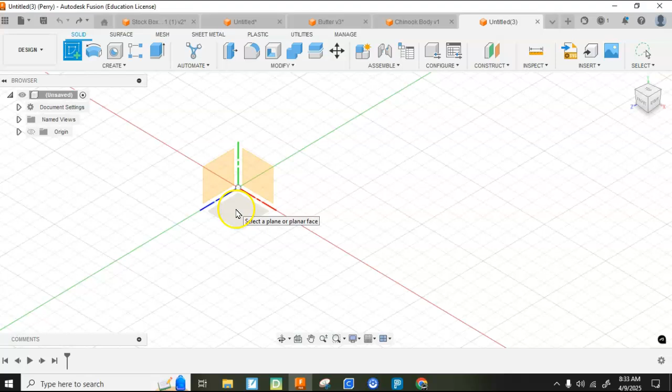It's got this general flag shape. I estimate on my model that's going to be about 4 inches long. So I'm going to go ahead and go into Fusion and make that. I've done some thinking about this. I'm going to actually cancel that. I'm going to right click and hit a new component.

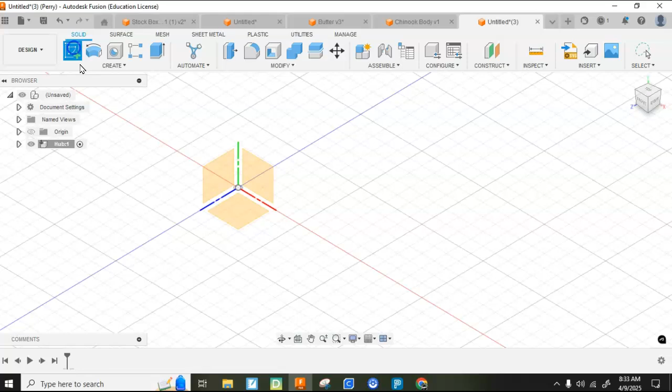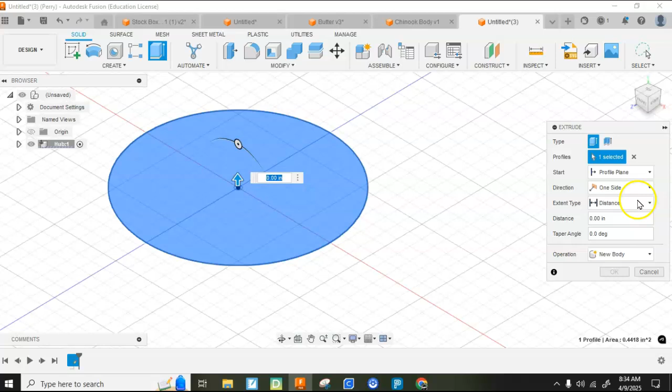I'm going to make a center hub that is going to serve as like a disc that holds the propeller blades, and I'll end up doing symmetry. I'm going to sketch that down here at the center. I'm going to be very careful because I'm going to want to use symmetry later. I'll make my hub 0.75 inches in diameter. I'm going to extrude it both ways because I'm going to want this axis later when I want to twist the blade. So I'm going to change to symmetric and I'm going to go down both ways.

Let's see, that's 0.1, that's 0.2 thick. So I'm going to make it a total of 0.3 thick. I'm going to hit OK. That'll work very well. Things will be aligned. This will just sit on right here. It'll be connected to the follower going down to the bevel gear, and then I'll have the blade sticking into that. So I'm going to design the blade in the same one.

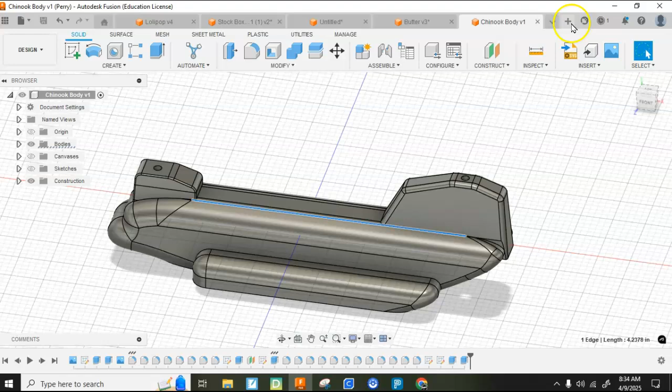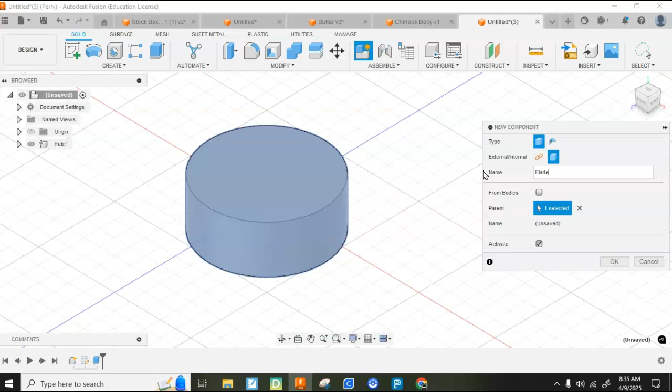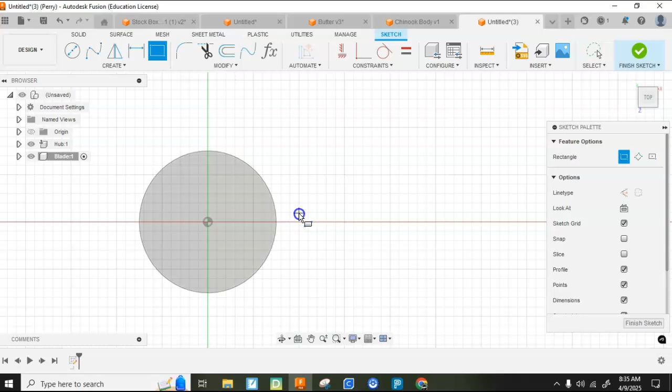So coming out, I said 4 inches, so I'm going to go ahead and sketch. Oops, I need to start it as a new part. What am I thinking? Right click, new component, blade. All right. Okay, let's go ahead now. I'm going to draw in that center and keep everything nice and centered. I said 4 inches, so I'm going to do a rectangle that's 4 inches long, and then go by sight from there.

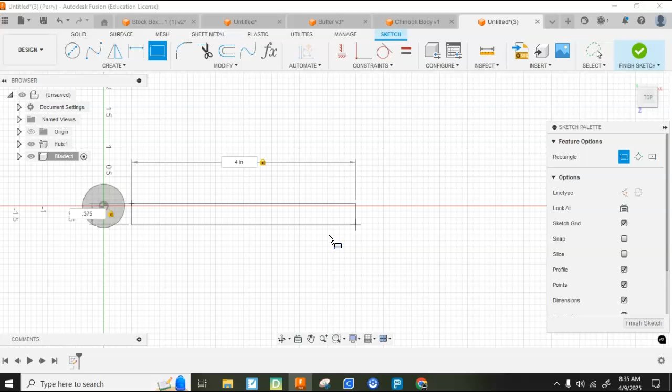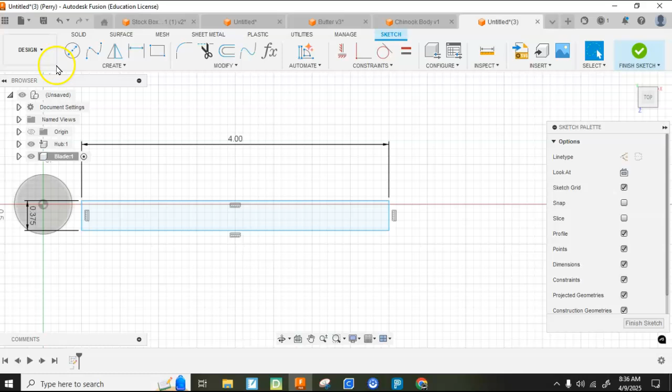So I'm going to go 4 inches, and then tab 0.375 and see if that looks right. I'm just doing this by eye. It looks reasonable for the flag, I think. Yeah, I'm going to enter it. I'm going to check my Chinook. I want to take out another part of that to make it the flag, so I'm going to do another box. Again, I'm just kind of doing it by eye. Let's see, I want to go from here and what looks right. Alright, so that was 0.375.

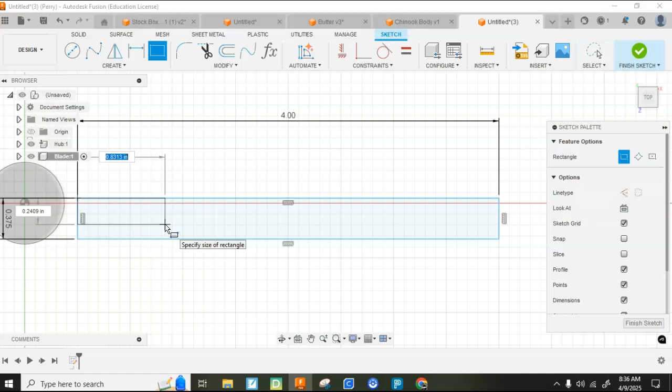I'm going to go about that distance, and then tab 0.25. That way I know that little line there is 1/8, which is helpful. I'm going to need to know that a little later. Alright, I'll finish this sketch.

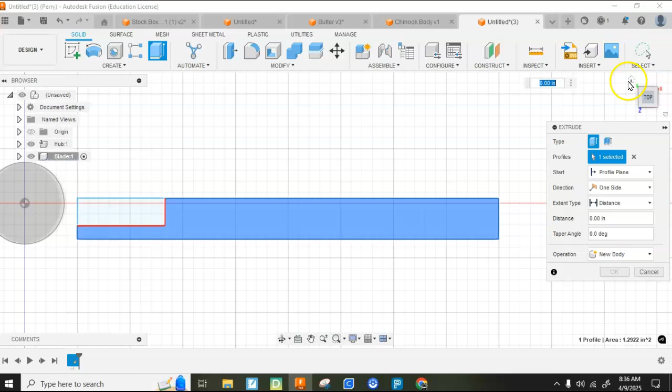I'm going to extrude this. I'm going to extrude this in the same level just because it's going to make life a little easier. So to do it in the same level, centered on that horizontal plane, I'm going to go either way. I want to go a total of 1/8 of an inch, so I'm going to go 1/16 with my extrusion. That goes a 16th up and a 16th down. That's 2/16. So yeah, that's going to look all right.

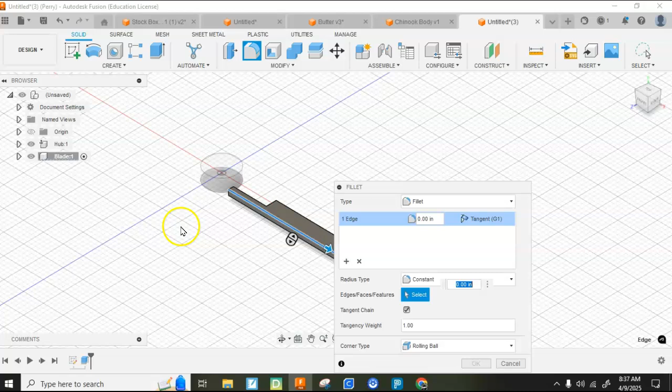If I were really getting after it, I might put a little fillet on these lines to make it a little more blade-like. I might sharpen that out and do some geometry. I'm going to skip that right now. Let's concentrate on the steak, not the pea, shall we?

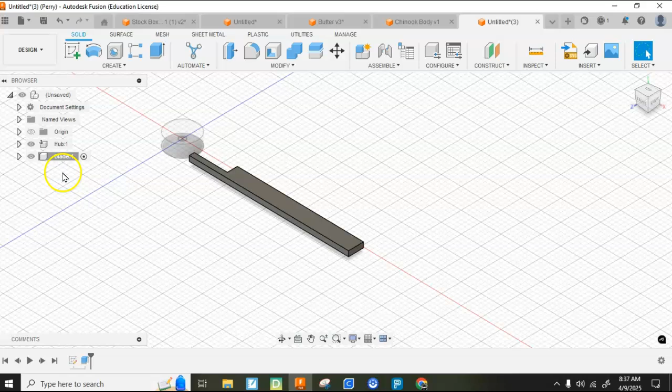All right. So now I'm going to make a hole that angles slightly, that will accept this, and this will go into the hub. I'll do a circular pattern of that hole and do 3 of them, and then I'll do 3 blades after I put it in. So I'm going to try to do the least amount of work. So I'm going to go back to work on the hub. This is 1/8 by 1/8 square.

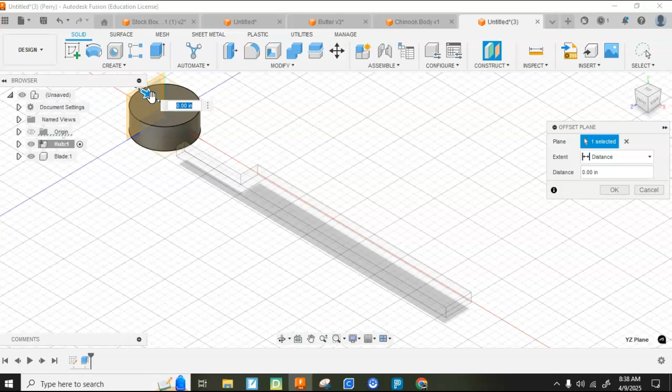So I am going to put an offset plane. I don't want this going all the way into the middle. Instead, I want to offset it a little bit. I want to go in, but not all the way. I'm just eyeing that up. I'm going to go a little bit that way, so it'll go in, but it won't interfere with each other in there. I'm going to go ahead and hit OK. All right. I say that won't interfere. I think that could interfere.

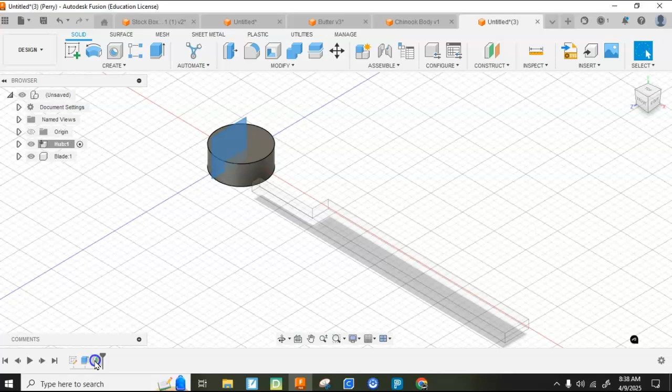I'm going to look one more time. I'm going to move it a little bit back down. Right there. That's what I'm digging. Okay, so now I'm going to sketch on this new plane. Again, this is where using that center rectangle is really, really nice, children. The center rectangle is going to go right in the middle of it, because I symmetrically extruded and I was operating on those planes, so I don't have to create any axes or planes. I did one offset plane and that's it.

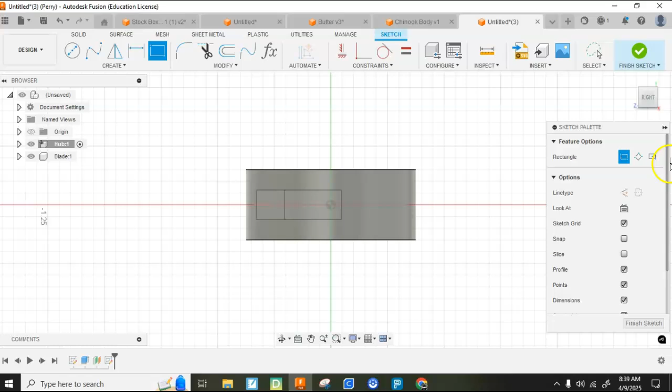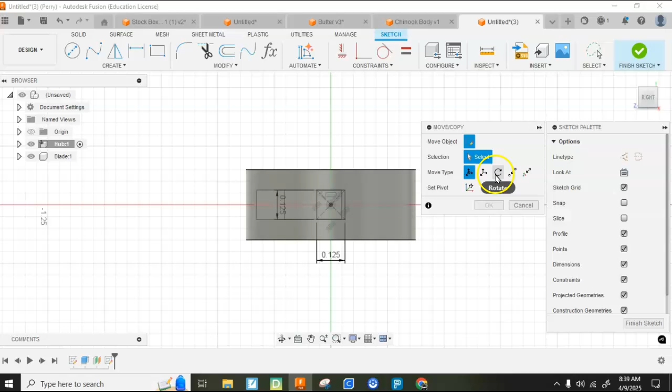I'm going to go ahead and put a center rectangle on there that is 1/8 by 1/8, so 0.125 tab 0.125. Now I'm going to rotate that. So watch this. I'm going to move copy. I'm going to rotate it. I'm going to choose those lines of that cube, and then it needs an axis. So I want to rotate it about this axis. I'm going to turn my origin on. It's that guy right there.

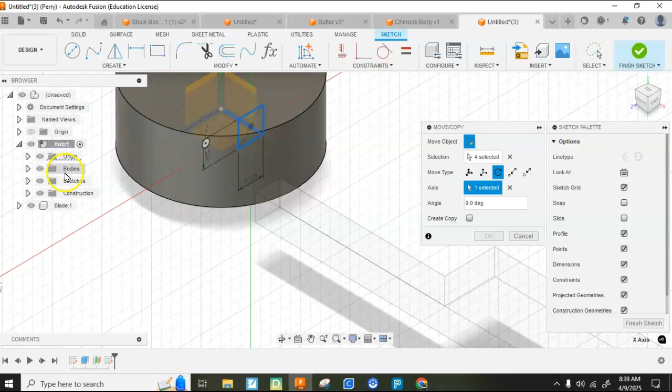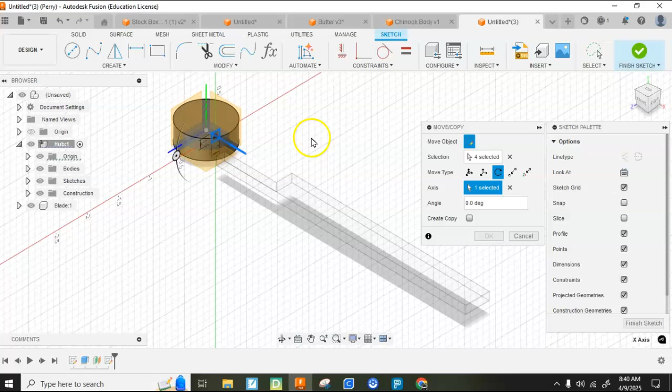And now I'm going to tilt my blade. Come in here, and how much do I want that to tilt, and in which direction? Let's see, I want to tilt it as I'm bringing my right hand into it. I would want to do righty-tighty. That would give me an angle of attack that would throw air down. So I want to go righty-tighty. And I'm going to hit OK. Again, you can mess with that all you want.

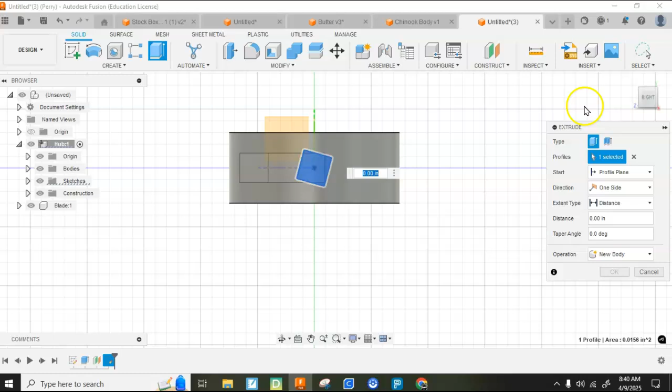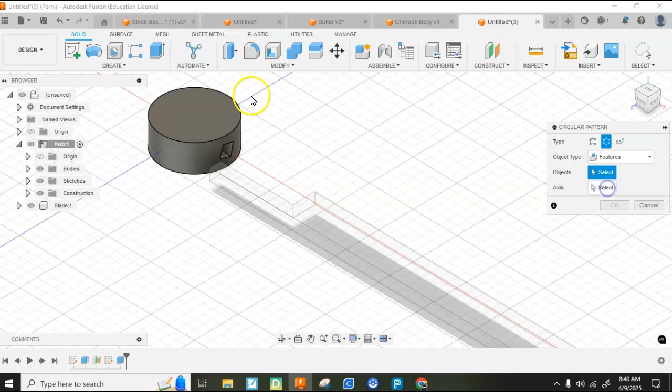I'm going to finish that sketch. Then I'm going to extrude that right out. That's a cut. I'm going to hit OK. Let's see, turn off that origin here. So that will fit into that just perfect, and it will be at an angle. Now, I want to create a pattern. That pattern is circular. I'm going to do this feature here. For my axis, I'm going to use that one. And now I have 3. Whee! All right. So now I'm doing pretty good.

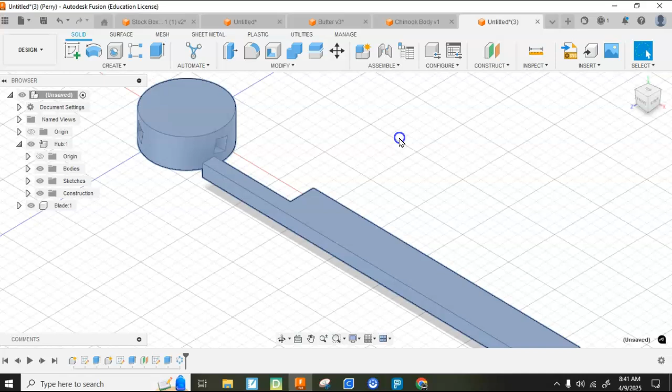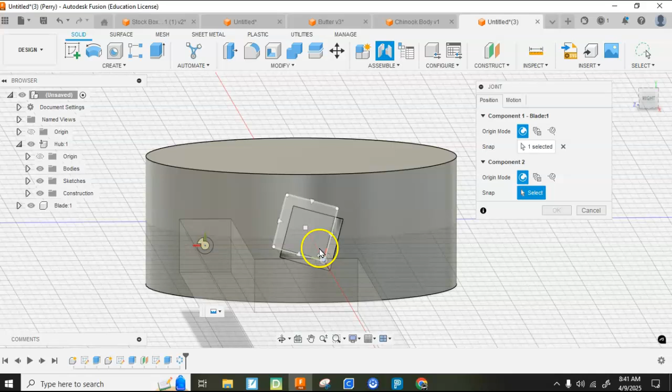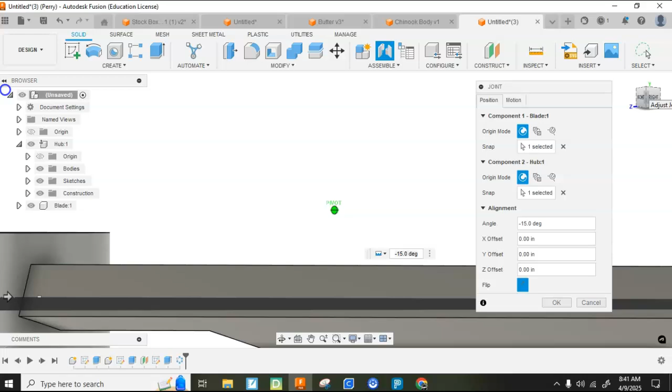Next, I'm going to assemble. So I'll go up to the top level, everything visible. Assemble. I'm going to do a rigid joint. Rigid. Yep. Now I want the center of that. I'm going to go into that and hit the center of that. All right. So now, do I need to rotate it? Yeah, I do. Boom! 15 degrees. Oh, yeah. I'm going to hit OK. Come up here. Is that body going? Yeah, that's going in there. That's pretty good.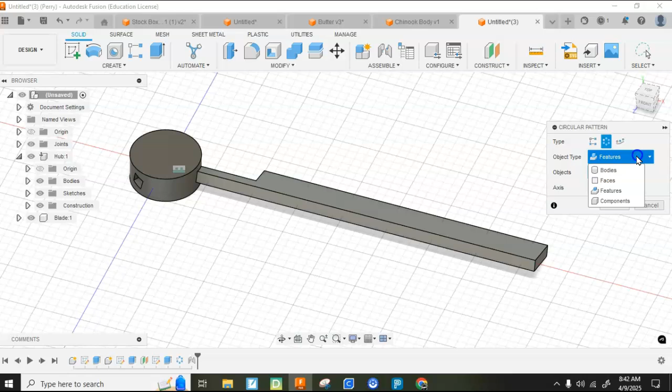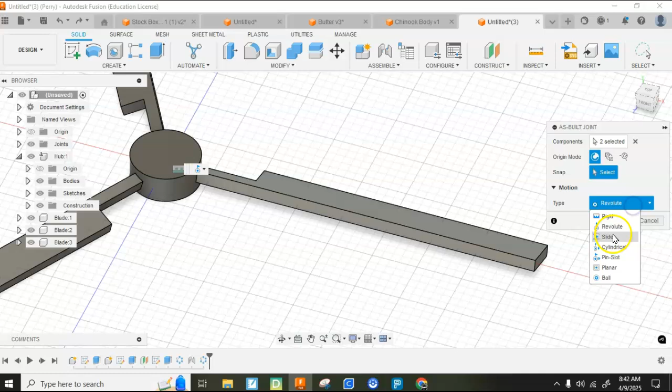So now to put those others in, I'm going to do a circular pattern, component. That's a component. I want to select for my axis that there, put them in there, and notice now this isn't joined. I'm going to Control Z to put it back, but it is in the proper position. So I can just go as built joint, tappy tappy. Whoa, not a revolute. Rigid. Okay. Assemble as built joint. Tappy, tappy.

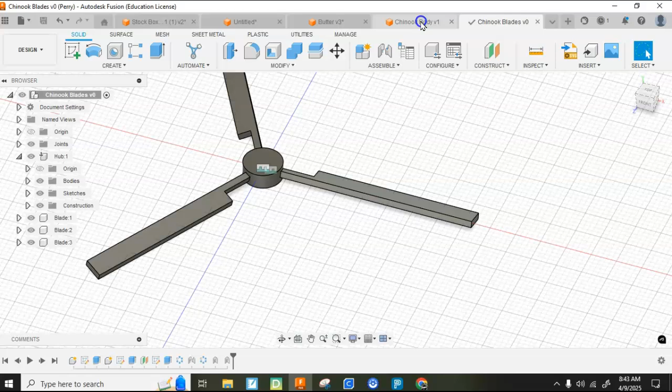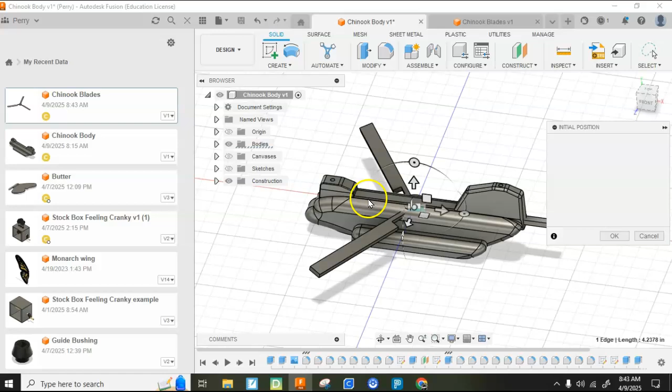All right, now I'm going to save this as Chinook blades. I'll make a folder called Chinook and put the Chinookie in there. Now I'm going to come over here, go up here and reload my recent data and see if I did it right. That's right. Let's put this in here. Insert into current design. Come on, baby. Be the right size. Oh, I think it's pretty good.

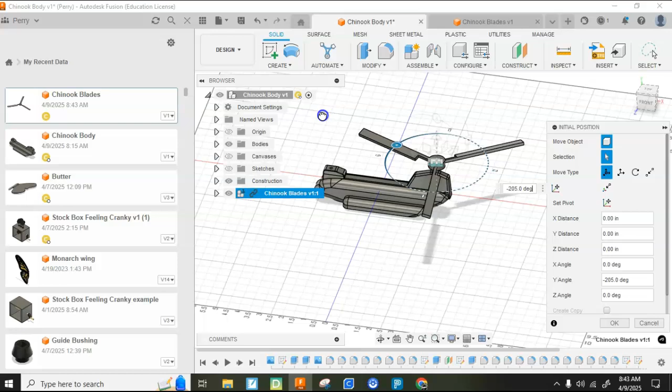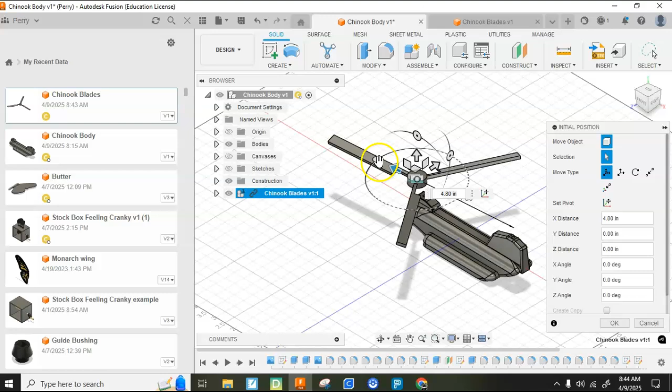I'm not moving. Let's rotate that around. Oh, I don't want to rotate it on that axis. Rotate it on that axis. Yeah, no interference. I might have to shrink them down after a bit. Let's move that over here and see if I got any interference. So I'd have the center of that there. And then I think that's going to clear it. That's when it's longest. Oh no, if I move it down. All right, so I'm gonna have to shave a little off that.

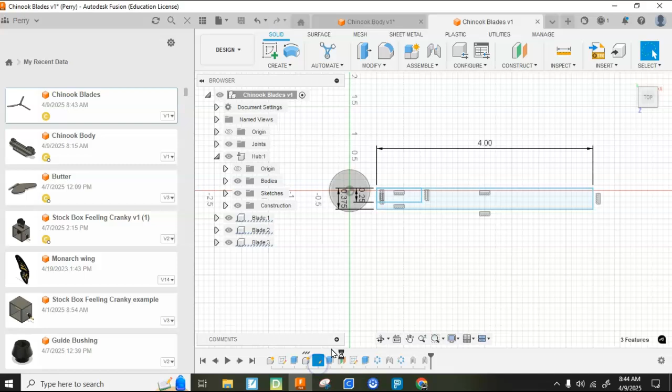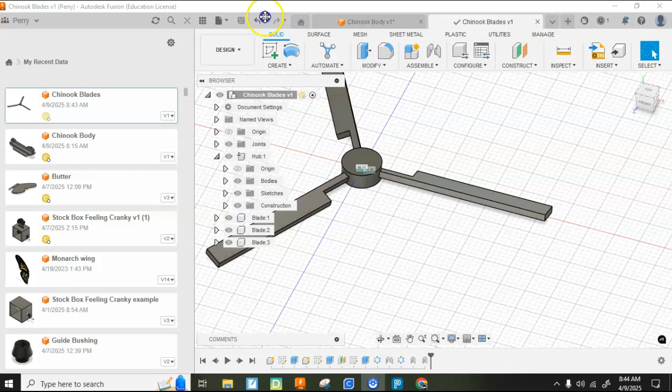Okay, so all I'm gonna do is go back to here, go into this sketch and change that to 3.5. Enter. Finish. So just shorten them up. Let's go up here and hit save. That'll translate. Now when I go back to the other one, I'll have a little message saying that something's changed. Yep. So click on that. I want to get that up to date.

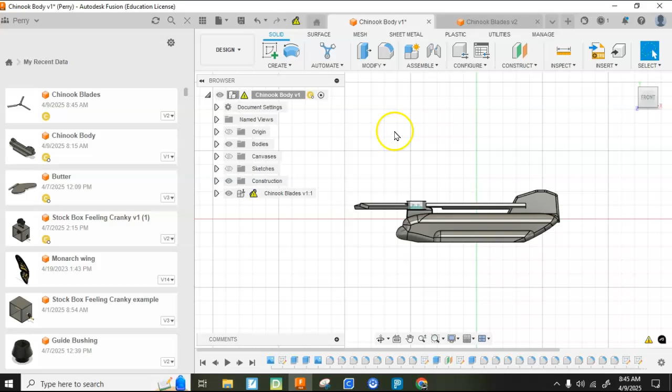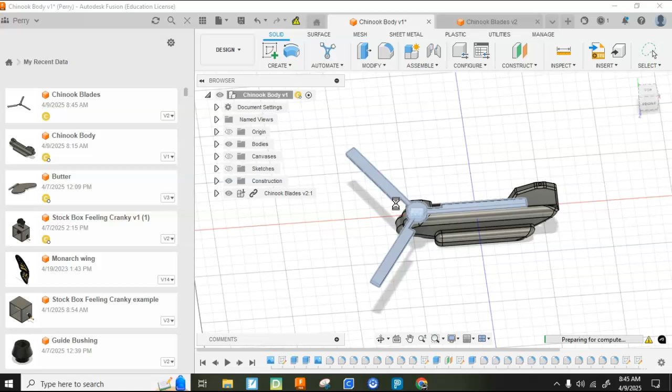Right click. Oh, and it'll only change one. So I'm going to need to change... No, if I change the original, then that would all do that. So to update, get the latest in the design workspace. Where am I going here? Continue. Okay. And I think that just did it. Finish it in place. All right. So that is a bit better.

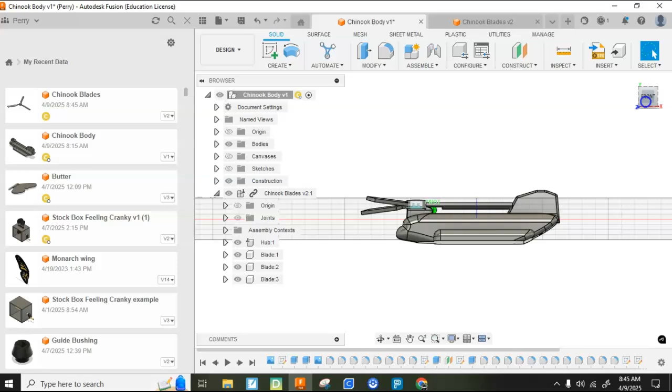Might have to go back and adjust it again. When it moves up, I don't care if it's close as long as it misses. So I'll go back in there and just take out the Chinook blades and reload. But you can see what I'm going to do to play with that. I'll stop there.